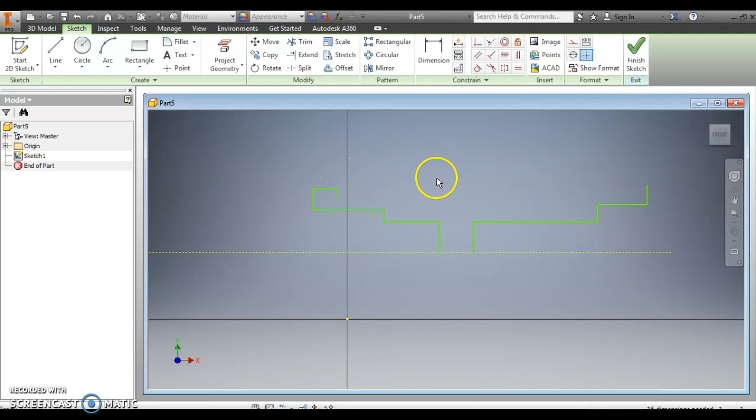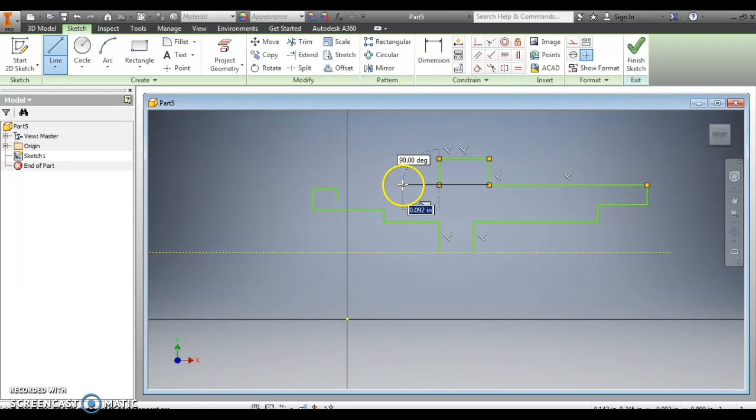I'm going to come back over here, and now, I don't want this lined up with that, but I do want it lined up with this. We will add this line later.

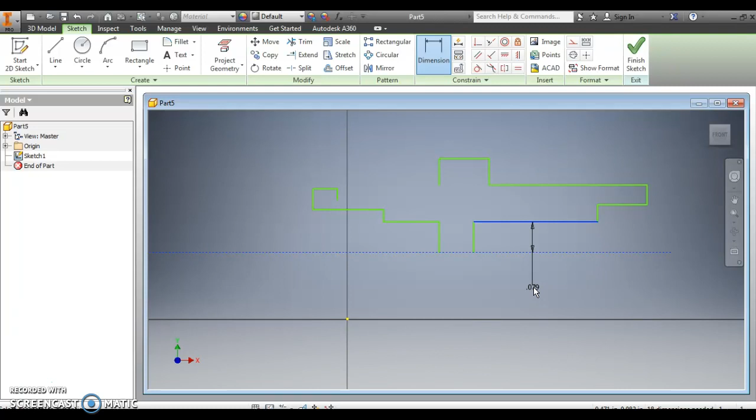So I'm going to start dimensioning it now, and I'm going to dimension this, and in the activity 5.5b, they give it to us as a diameter. So we need to divide it by half to make this a radius, because from the center line, it is a radius. So just copy in the dimensions of the diameter and divide by 2.

Now, these two should be constrained together. We'll go ahead and just dimension it and see what we get. It says it is. Now we'll come in here and dimension this guy. Now we'll come up here and dimension this OD.

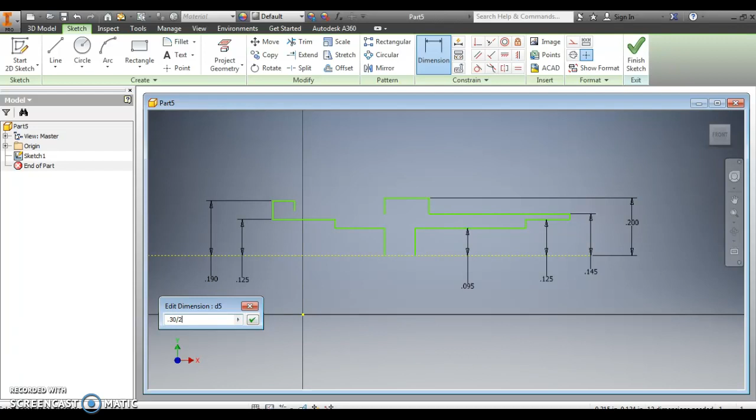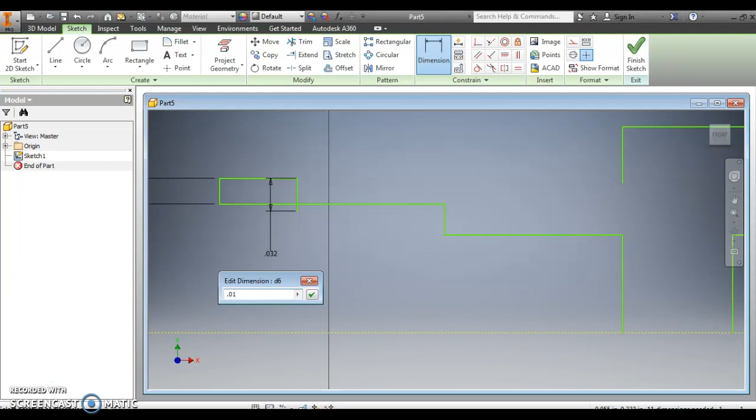Now that gives us all of our heights. So we're going to come in here and we need to dimension this guy. Now we're going to come in and draw the lengths. This is not a diameter, so we'll just type the full lengths in.

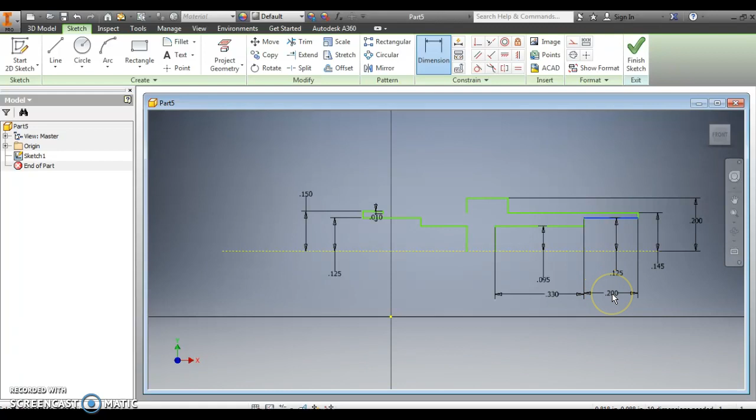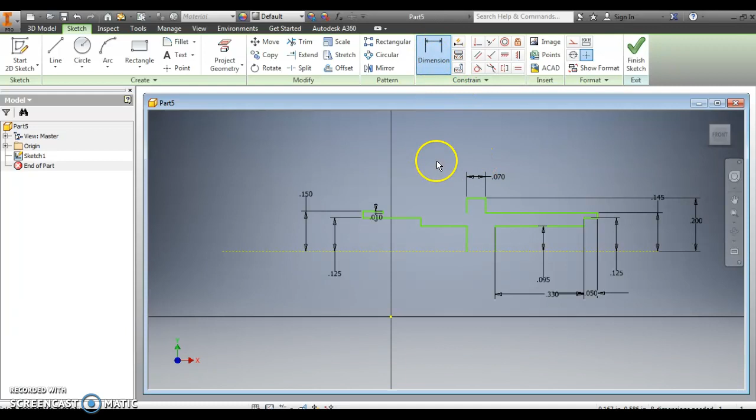Notice that we do not specify what this length is, but we do specify this one. Again, we want these two to be constrained. So let's just go ahead and make sure it is now. We want the lines to be collinear with each other. That's two line segments to lie on the same line. So we want this and this.

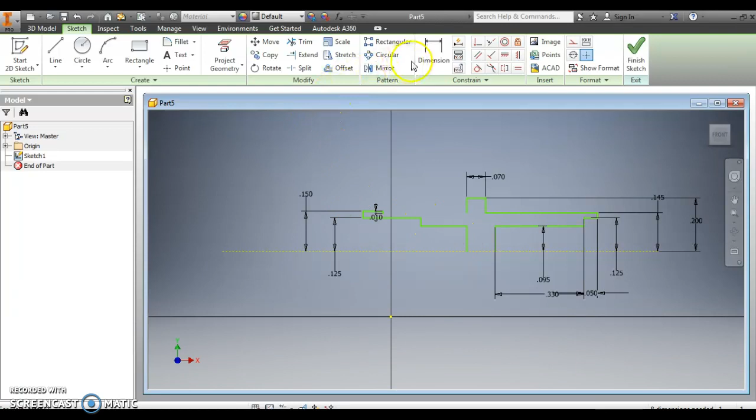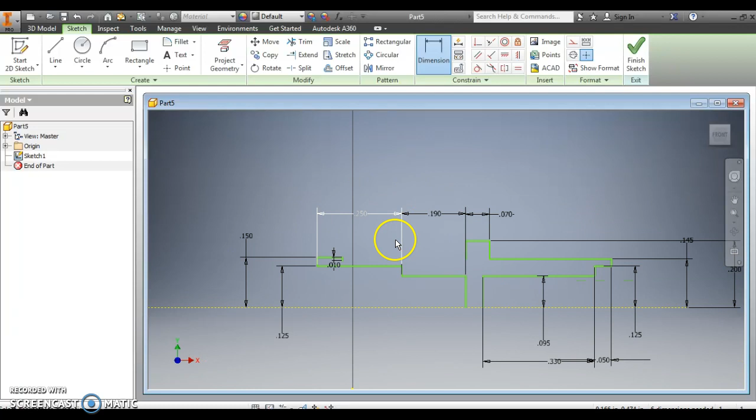So it's over constrained, so that means it's already tied together. So now we're going to come in and continue dimensioning. We want to know this and this. Okay, so now I'm going to come in here and I see that I dimensioned this wrong, so I'm going to remove this dimension.

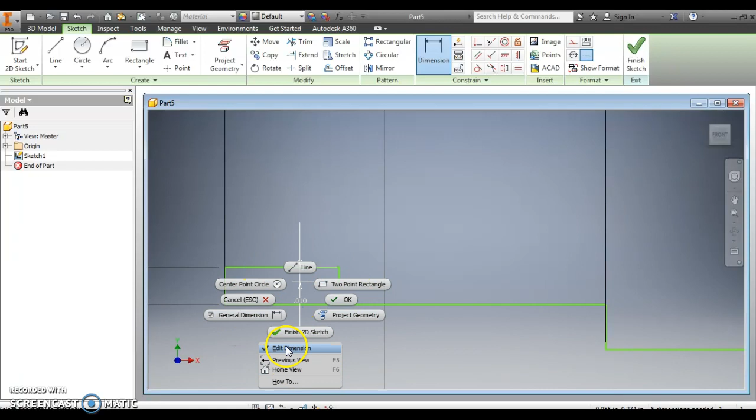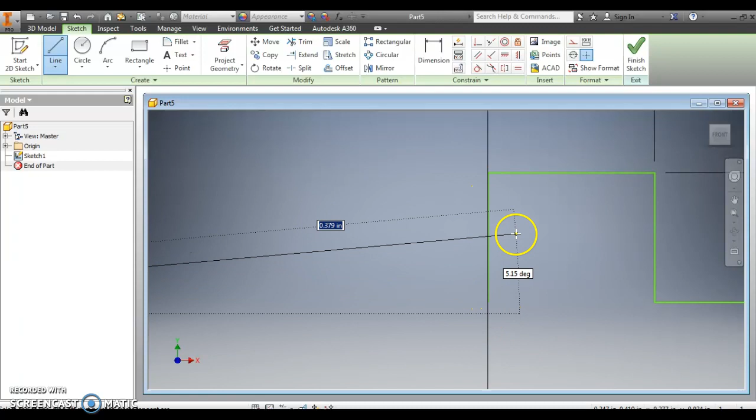Okay, so I'm going to get out. I'm going to try it again. Delete. There we go. Okay, so now this, I'm going to draw a line from here. Let's just put it here then. And we're going to come in and I'll trim.

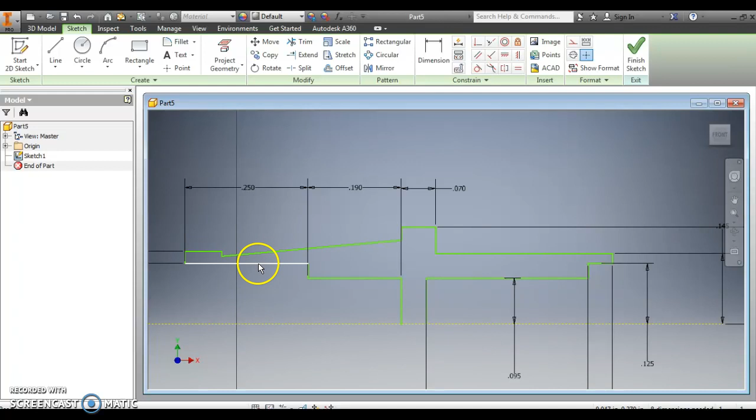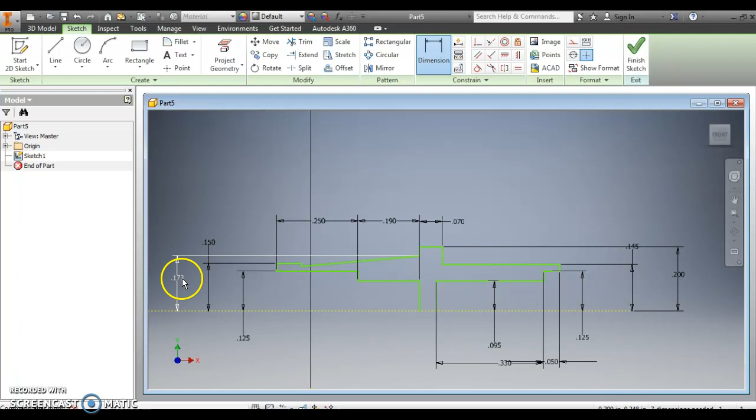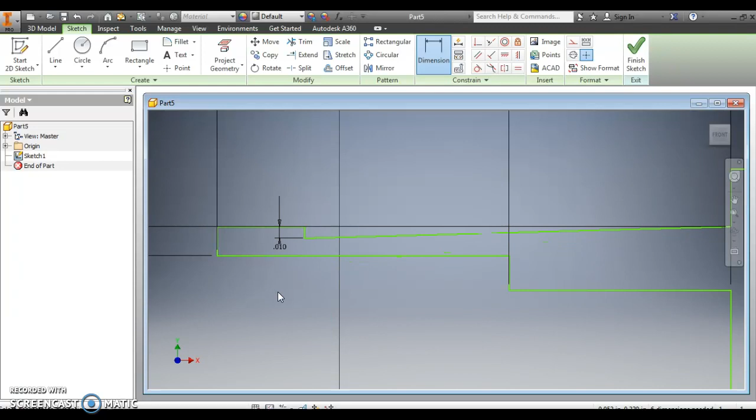Okay, now I want this point to be in line with this. So we'll come in here and it's easy to dimension from this point to here. And it is going to be the same as this one. Okay, so this is fully dimensioned now. We're going to hit finish. I can click out of dimension, hit finish.

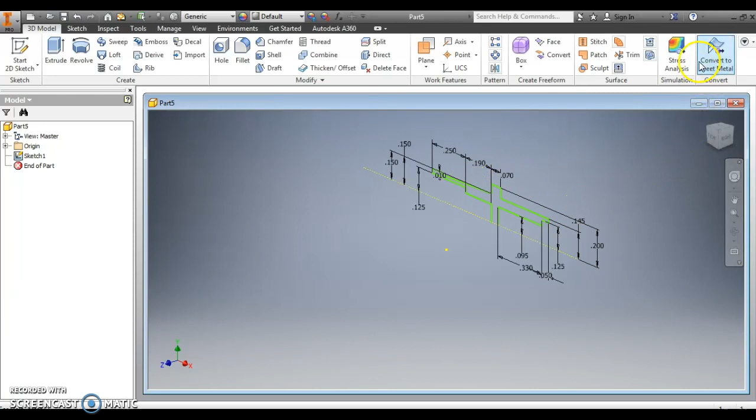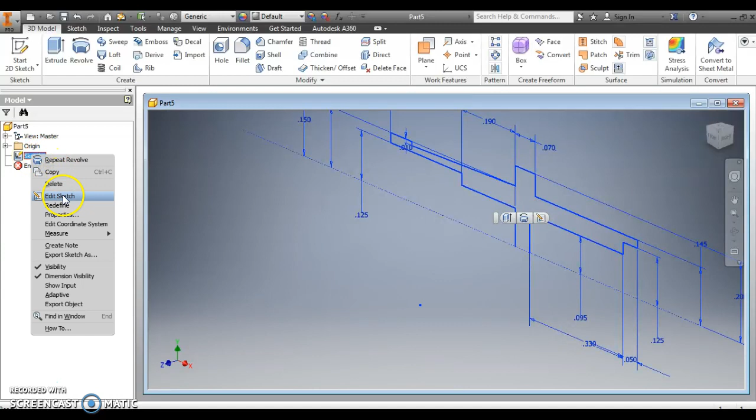I want to revolve it. So I'm going to come up here, hit the revolve key. I want it fully revolved around the axis. This tells me there's a line missing. See how I can see through it? So I'm going to hit cancel. And I'm going to come in here and I need to edit my sketch. Everything was blue, but I saw that there was not a line from here to here.

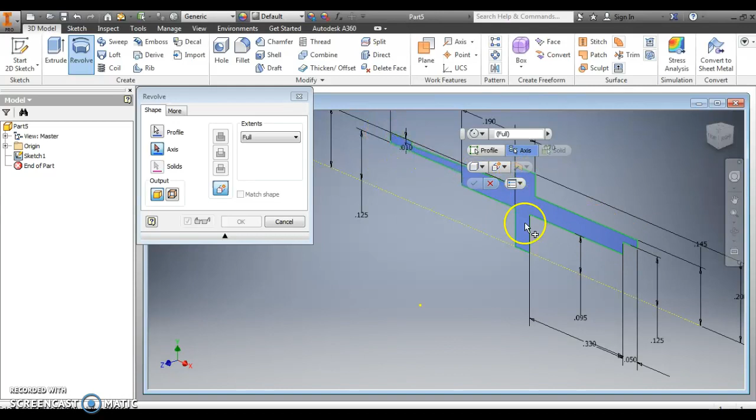So now I'll finish the sketch again, go back to revolve, see how it's all colored in the profile. I have that now, so that's great. The axis, I'm going to hit. Notice now that the part is gray, it's not that clear. I can hit OK. And I have a really good, solid plastic part now. Now, I still need to cut out the two surfaces here, little square.

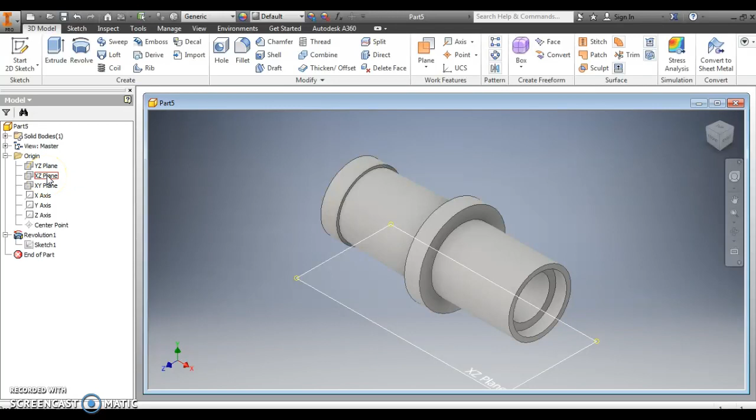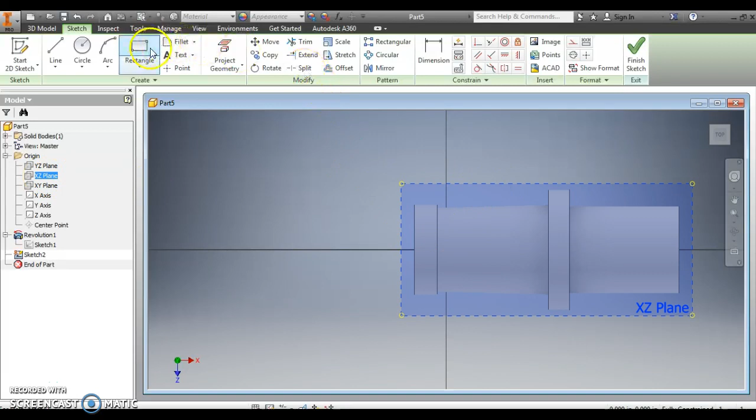So to do that, let's go ahead, hit the home button. I'm going to open up the origin and I'm going to open up my revolution. I want to look at planes. So I don't want that plane. I want the XZ plane. Let's go ahead and make a sketch. And again, I want the XZ plane. I'm going to make a rectangle.

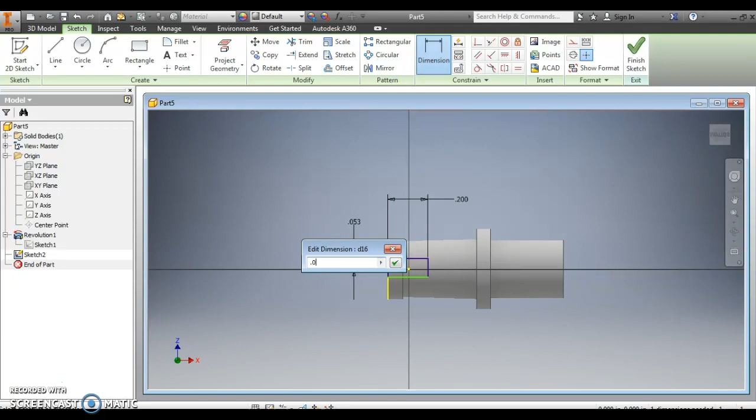So as you can see, it's underneath it, so I'm going to rotate it. So now I can see it, and now I can dimension it. So I'm going to come in here, and I'm going to dimension this. You can see that the dimension for it is 0.2. And the distance from the origin to here is 0.02. And the entire width is 0.04.

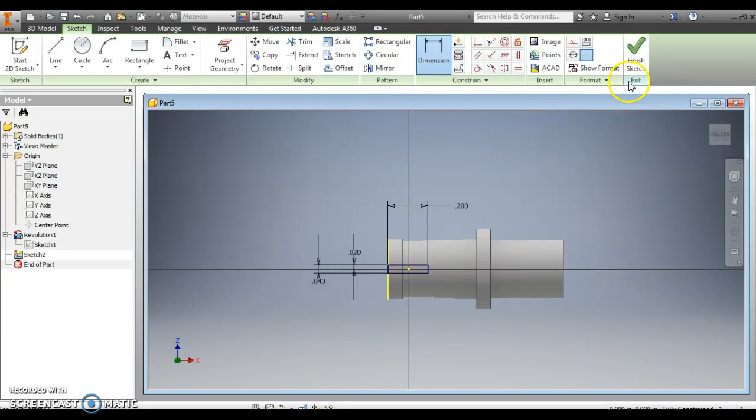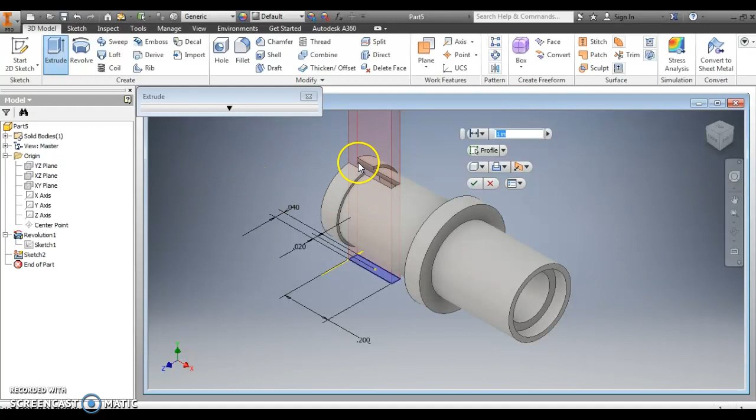And I want to cut that. So it's drawn. I'll hit finish, and I am going to hit the extrude. I don't want to extrude, I want to cut. And I want it to come up. So everything looks good. I'm going to hit enter. Let's go ahead and rotate it around. You can see that I have a nice cut through it. Everything looks really good. Hit my home position.

Now I'm going to hit save. Again, this is going to go to your H drive. It's going to my desktop. It's going to go to the Inventor folder. It's going to go to the Automoblox folder. And I am going to call this Axle, the initials, and I'm going to hit save. And it says it's not part of the active project. We hit yes because I want it to go to my folder. So this now, it names it Axle with my initials.

This completes the activity. So hopefully you guys follow along in the activity step by step, follow along in this video, and you'll do great.